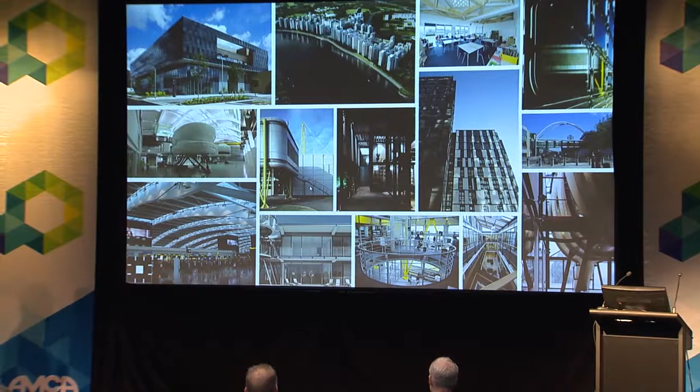So who are Bryden Wood? We started out 22 years ago as a firm of architects. So I'm technically an architect by training. It's increasingly hard to tell anymore. We always had a real interest in design for manufacture and assembly. So we were specifically set up to answer this sort of question.

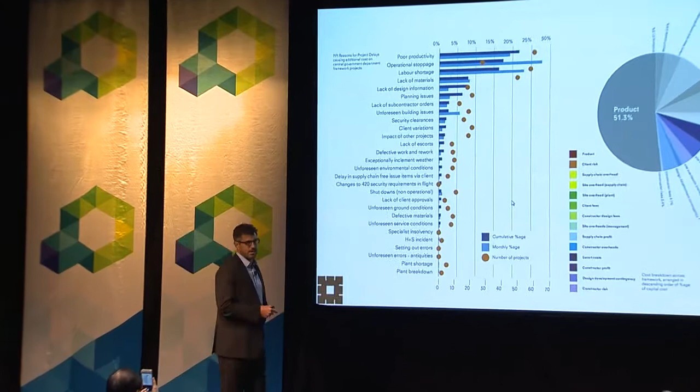So everyone's got their favourite statistics for why construction's so crap. You've seen the productivity one's been mentioned a couple of times over the last couple of days. You've seen the statistics for numbers of projects that go over budget, over time, et cetera. These are my favourite statistics. This is from a big trawl that one of the main government departments in the UK did on all of its projects over its framework, and it found that these are the big hitters in terms of projects overrunning in terms of cost and delays.

You can see the big problems are poor productivity, we've talked about, labour shortage, lack of materials, lack of information. So if you could get the right things to the right people at the right time with the right information, that's a significant chunk of the problem sorted. So come on, construction, we can do this.

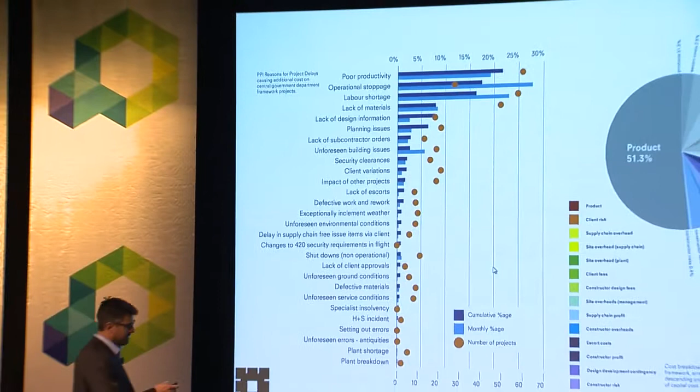This is another one. They looked at how much of every pound they spend ends up in residual asset value. I suspect this is not atypical for lots of clients. Only about 50% of the pound or dollar they spend on a project ends up in actual value. The rest of it disappears into all of these other things. So a sort of traditional value engineering exercise would be to squeeze the supply chain and try and eke out a few percent. Our thinking has always been, forget that one, that's a massive chunk to go after. If you could start driving down the percentage of non-value adding activity, that would be a huge step forward.

Those are those arranged in order. So product is 50%. Client risk is the next biggest one, which tells you something about the state of the industry. Then you get overhead on overhead on overhead, because you get the multiple tiers from main contracts all the way down.

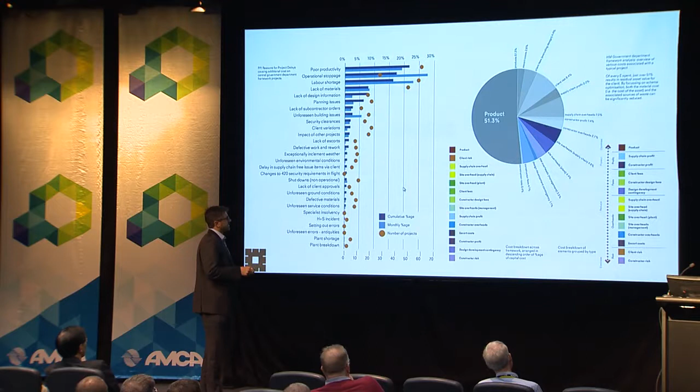We've been reorganising this and saying, right, we will absolutely optimise the product. So this is what manufacturing does really well. The car industry, aerospace for years have been shaving grams off components, taking out activities in the manufacturing space, just making incremental changes that make the product ever better. So we optimize that, we protect this.

As I say, clients very often try and squeeze a few percent out of the supply chain. If you do that, they will hate you, and they will get that money back because they will gouge your eyes out on every single change order. We've been saying to clients a much more sensible thing to do is protect people's profit, be very open book, make sure people get paid well for the work they do. That will enable the behaviours that then allow you to move things forward.

The next one down, we try and reduce fees. So for an architect telling you that we're trying to reduce design fees is a bit spooky. It's actually been a sort of recurring theme over the last couple of days around the use of tools for automation, spending more time on the really value-adding bits of the design, not on the churn of door schedules and pulling things out. So we're trying to actually overall reduce fees by learning on projects and doing things better each time. So ultimately it becomes quicker and easier to design buildings, and we'll show you what that looks like.

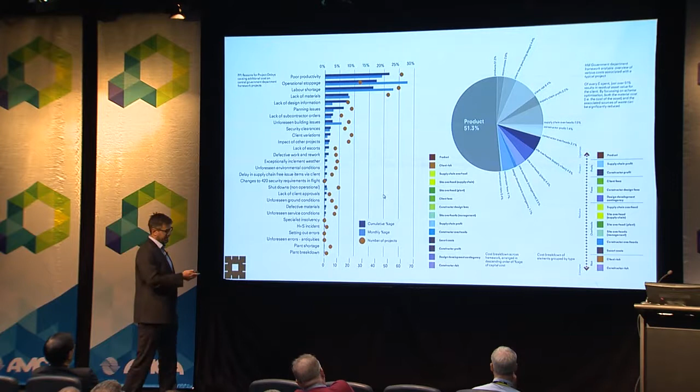So materials start to accumulate cost as they go through this process. Doug yesterday talked about if you had an absolute focus on speed of assembly, you would start to change the whole design process, you would start to do things very differently. Our equivalent is focusing on asset value, residual value, and saying the closer we can get to raw commodities, the closer we can get from literally raw material gets touched barely at all, and then it's a building, that will start to drive out huge chunks of this. It will start to get enormous value. It will start to change the way you design your buildings.

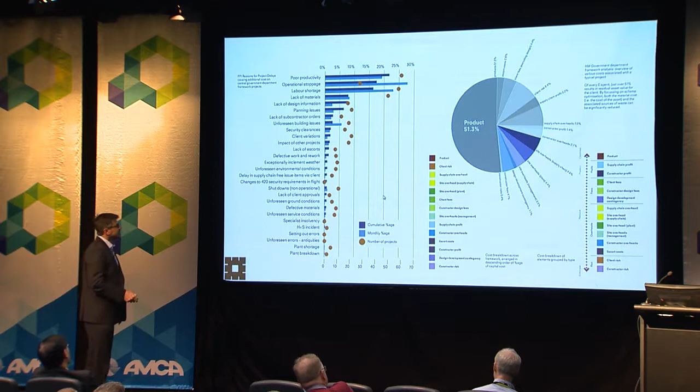And then the bottom one, we try as far as possible to eliminate this. So we do an awful lot of testing, prototyping of systems. Typically on our buildings, by the time we get to site, there is nothing left to learn. People are not there measuring, scratching their heads, wondering what to do. People are following a series of instructions and assembling assets, and we'll show you what that looks like.

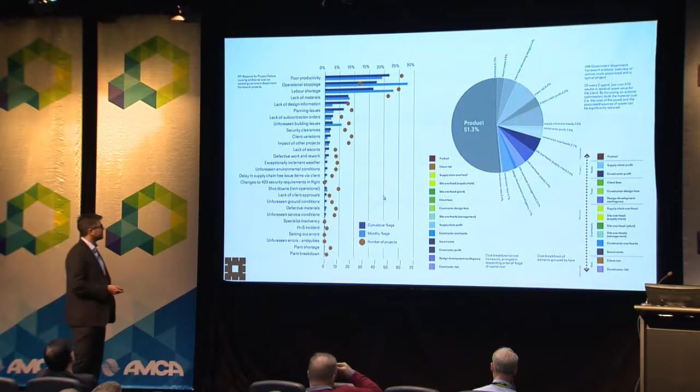So again, for a team of architects, some of the biggest gains we're making at the moment are in infrastructure. So we're coming into water, rail, roads. The fact that we're architects, people assume you can't possibly know anything about roads and rail, which is actually a good thing because we don't come with 30 years of doing the wrong thing. We come in with a very refreshed attitude saying, why do you always do that? What's the principle? We get very quickly back to first principles.

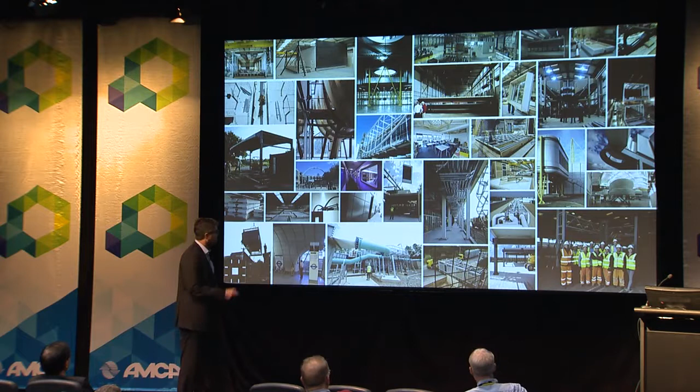The other thing on that to notice, that was our factory. So for about 8, 10 years, we had our own factory, which sort of came about because we got really annoyed with the industry not keeping up with us. So we started out as architects in 1995. By shortly after 2000, we got our own mechanical, electrical, structural engineers, because we had to have all the disciplines to do the things we wanted to do. We then started prototyping, those are the 2 Simons, prototyping some of the systems that we wanted to do, because again, we got annoyed of designing things that the industry said, you can't build a building like that.

And eventually we got our own factory because we just had to completely own the process. We don't have the factory anymore because we'd sort of proved the point. We didn't need to manufacture things as much, and we now have a series of facilities that we use on and off to prototype systems.

So we're much more likely now to develop a system, prototype it, test it, learn everything there is about it, and then we go out to the market and say, right, I'm not asking you to design anything, I'm asking you to do this activity 10,000 times absolutely perfectly, and it's a very, very different way of procuring.

We would typically back ourselves now to take 30, 40, 50% out of cost and program for almost any project. These are some of the big modular things. That's that data center stuff at the airport again. You can look at those later.

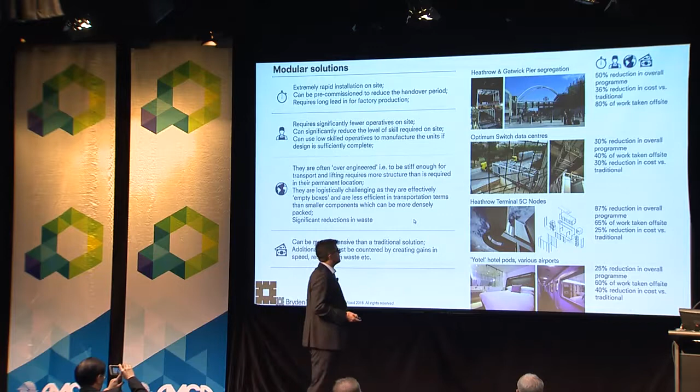We've almost always worked in a very 3D environment. So the reason I got involved in the BIM task group when Mark Bew and the team started setting things up, we were one of the very, very few people that had actually been doing this for a long time. So we had an awful lot of expertise around using not only software authoring systems, but also data visualization platforms.

We use a thing called Lanner Witness, which is software typically used in manufacturing to model manufacturing processes. So we don't just have the design authoring software. We bring a whole load of different skill sets to bear.

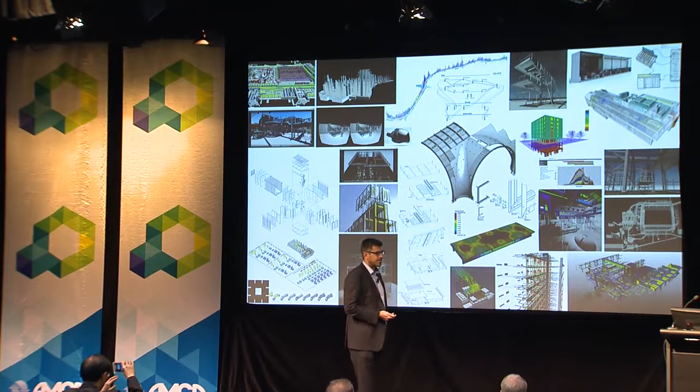One of the biggest growing teams we have at the moment is mathematicians, financial analysts. We've got some chemists. We've got a geophysicist. So some of the people we're employing now are just not at all construction people. They are just bright people who can work very complex problems. So we do increasingly very front-end data analytics, data modeling now.

If you look on the website, these are the capabilities we talk about. So we've still got the traditional design disciplines. DFMA sits fairly centrally. Systemization is like the big brother of DFMA. So if you want a one-off project, you want some DFMA. If you want to build Crossrail or a series of hospitals or the big justice estate, you need systems.

So we do an awful lot of work in this space now, generating mass customizable, flexible components so we can generate very site-specific, very individual buildings, but using components that are almost completely standardized. So just as every person is completely different on the outside, at DNA level, we're incredibly similar. Process facility is some of the complex pharma things we'll talk about.

Design for asset optimization is a thing where increasingly now, and this has been talked about over the last couple of days, we get called in by clients or contractors to fix designs that are non-constructible. So very often, clients get a design in, it's just too expensive. We get called in to re-coordinate it, rework it, turn it into a DFMA type thing. So I'll show you what that looks like for Crossrail.

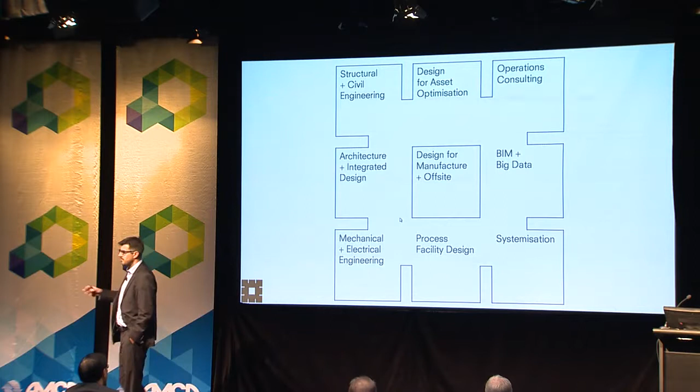And ops consulting, we got to a point probably 2008, 2009, where we were saying to clients, look, we know that if you want a building, we'll nail that. It'll be quick, it'll be cheap, it'll be very high quality, it'll be manufactured. We could still do a fantastic job of building completely the wrong thing because you as a client don't know what you want. So we found lots of clients effectively write the brief by building the building and then knocking things about through the construction process and then making lots of changes and then ultimately getting a building going, yeah, now I can tell you what I want.

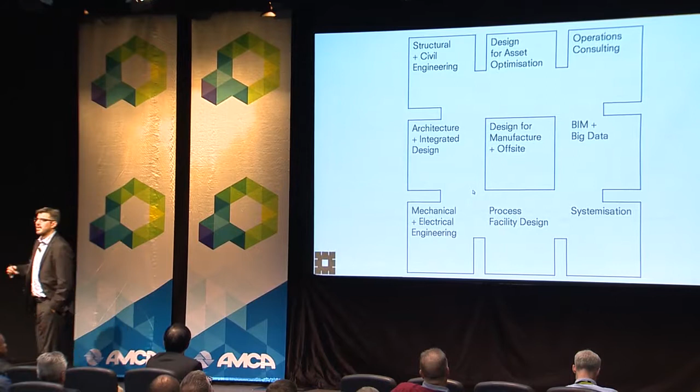It's not quite this. So we started moving earlier and earlier in the process to say, actually, don't tell us what the brief is. Tell us what the problem statement is, and we'll help write the brief. We'll develop the brief. Then we can design a building that won't keep changing through the design process. Then we can start to componentize it.

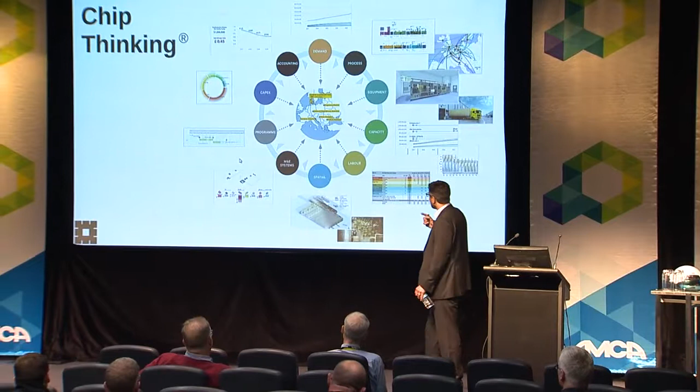So we ended up with a methodology we call chip thinking. We found with particularly complex client organizations, so GlaxoSmithKline, healthcare people, they have a whole load of different stakeholders. They all look at the business through a really specific little lens. So they're sort of subject matter experts on one tiny bit of the problem. They very often don't talk to each other. They very often don't know the others exist.

So we started breaking buildings or processes down into sort of value-adding or transformational activities. We then started finding out what every single person in the business knew about that particular aspect. And the idea was like chips on a motherboard, that you could aggregate loads of information or insight around a particular thing. You could plug a load of them together and then you could see what happened and you could see how buildings started to work.

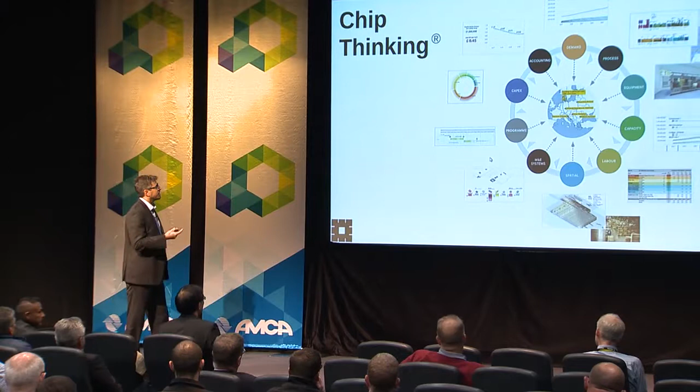So a healthcare example, at one level, we'll model every single nut, bolt, screw and piece of medical equipment in a theatre. At one of the chip levels, a theatre never exists on its own. It always has a clean core, an anaesthetic room, clean and dirty circulation, some plant that comes with it, a digital hub. So that's a sort of cluster of things that always happen together. So you can start to break buildings down into clusters of activities like that, start to learn how they work, and then start to put them together and test a bunch of hopefully very visual kind of data outputs.

So these are all the sectors we work in. I'm not going to talk about all of these. I'm going to explain the pharma stuff because it's a fairly quick way of showing sort of end-to-end the sorts of things we do. I'm going to talk about rail and highways just because they're some of the more sort of digital to physical linked things we're doing at the moment.

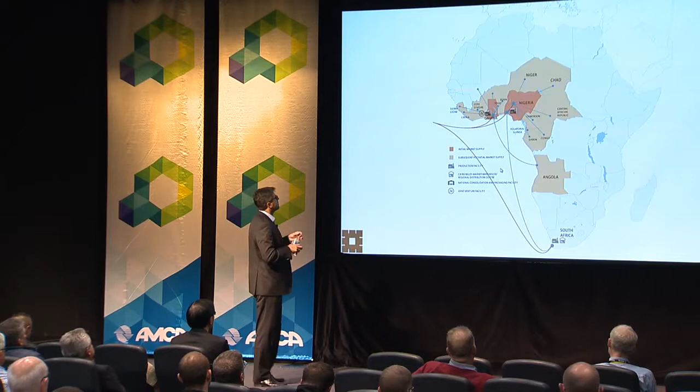So this is a good example of a problem statement that clients come to us with. GlaxoSmithKline have an initiative to get to 80% of the African population by 2020. So that was the question. They came to us and said, Africa, what do we do?

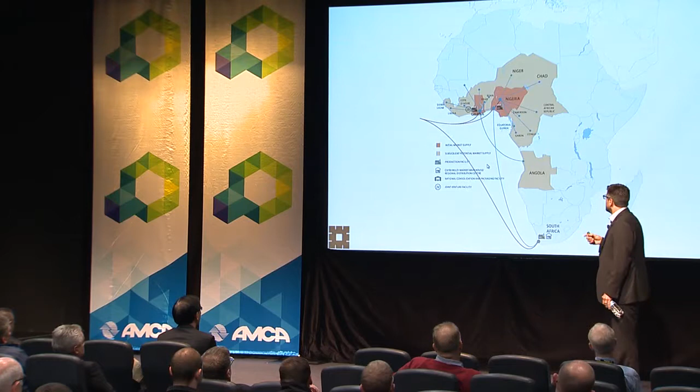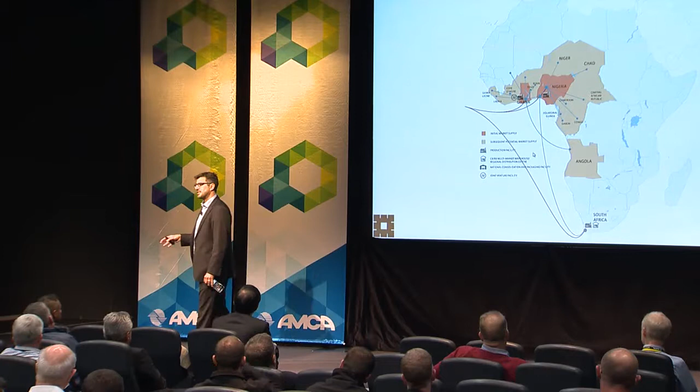We've now got to a point in our office where we've got an entire floor of the office that we literally give to clients. So we give people free space in our office to come and work from the office. People were saying, why would you want the clients there always looking over your shoulder? We were saying, I guarantee you the gains we'll get in terms of productivity and our speed of iteration by having the client there will more than pay for the space. We don't mind clients seeing what we're up to. We'd rather be very transparent about it.

And we found now that we have a completely permanent presence of GlaxoSmithKline people in our office. Adam heads up our Singapore office, which was largely set up to work with the Asia Pacific GlaxoSmithKline people. So we have this sort of nice relationship now where it's impossible to tell who's one of our people, who's a Glaxo person, who's a chemist, who's a specialist in a particular piece of production, who's a logistics person. And the speed with which we work these problems is now absolutely lightning fast.

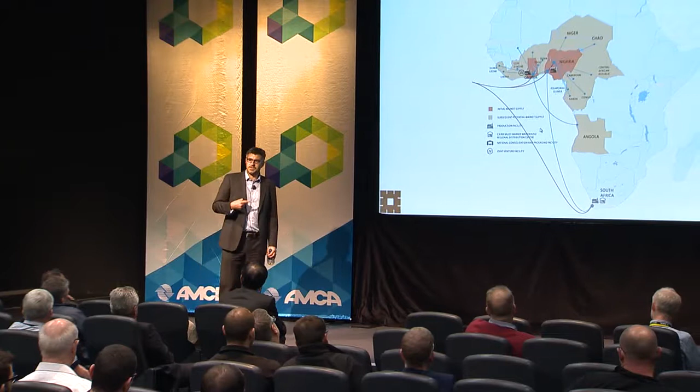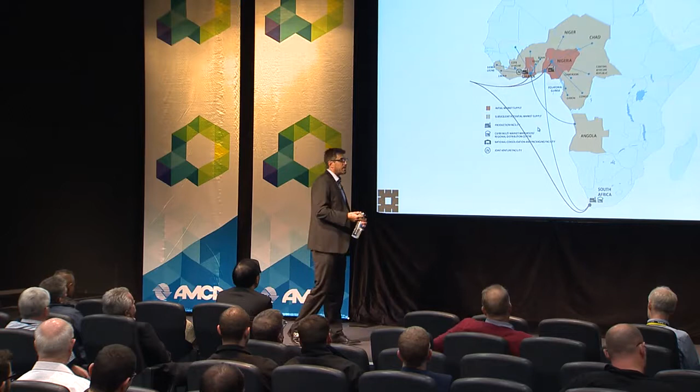So for this exercise, we did effectively mathematical models describing population centres, infrastructure, geopolitical stability, transportation, logistics. We started churning lots of options around, do you bring in finished product and distribute it? Do you bring in raw materials and make it? Do you bring in finished things, package them? What do you do with Africa? What's the mix of products? Where do you make them? How do you build them? Which has been enormously successful.

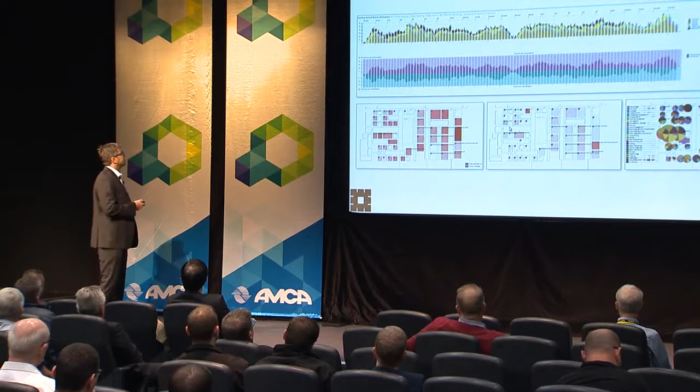At the next level down, Adam gave me a great example just now actually, one of the things we very often do is convince people not to build a building. So Frank mentioned this yesterday, the idea that the best building you'll build is the building that you don't build. So this was an example where the assumption was a whole new asset was needed.

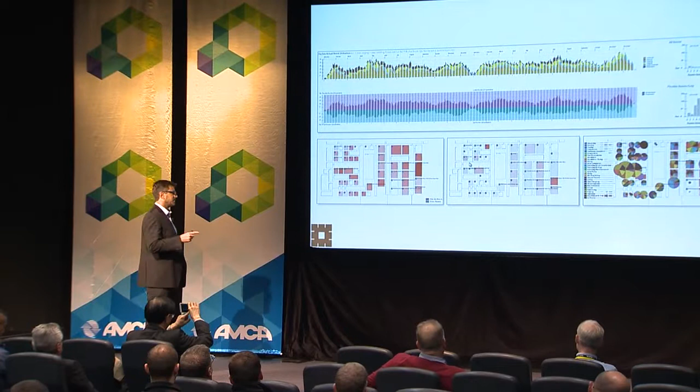We went in and we measured the intensity of the usage of all the different spaces, and then the types of capacity, types of capability, what they did in those spaces, and worked out that you could upgrade some of the MEP equipment, you could make some of the spaces a bit multifunctional, you could get a room booking system, and you could wring out quite a few, do you know the numbers?

Quite a few percentage of extra capacity from exactly the same equipment, exactly the same machines, people, all the rest of it, just by organising things differently. So we very often now get people, you get the project sponsors that got the £50 million check. It's the only time in their life they'll get to commission a building, and we're saying, I wouldn't do it, just wouldn't build it.

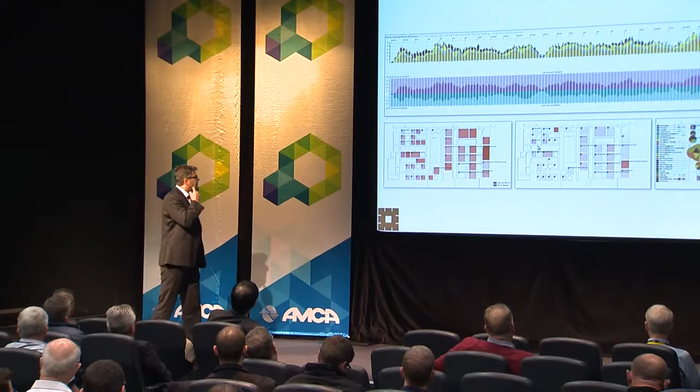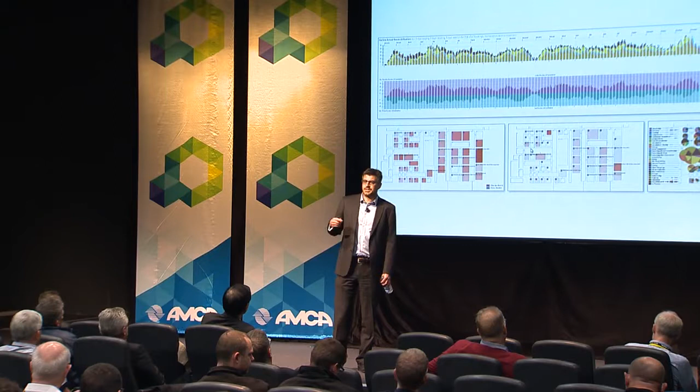We got audited by McKinsey a few years ago now to come and look at all the stuff, because Glaxo were making some really big decisions based on our say-so, based on some fairly young people doing some stuff on Excel. Actually, McKinsey audited us and said, they call it best-in-class consulting, and said the most valuable things we had done were things where we'd convinced them not to do a project, and then 6 months later, lo and behold, population growth wasn't working the way they expected to. The market was moving away, generics were coming in.

So we've got loads of case studies now. There's another one, I can't tell you the details of it, but you reckon you've saved 39 million quid this morning from convincing them not to build a new asset. So this is really powerful stuff now. What it does mean actually is that when there is a project, everyone sort of trusts us to do it because we've gone through all the iterations.

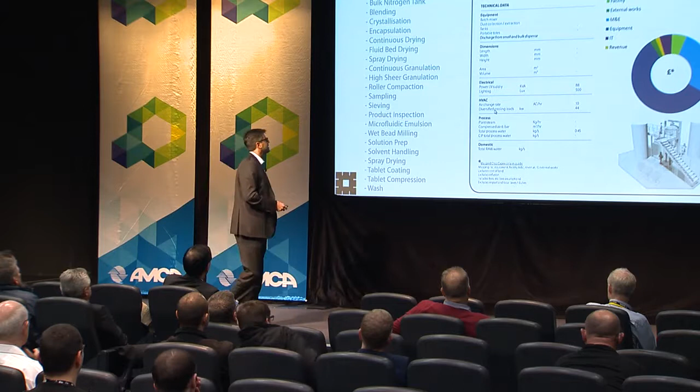So next level down is the individual chips for a piece of equipment. So we've got now certainly hundreds, probably thousands of these chips for probably every type of process that you need in the pharmaceutical space. We've got a library of chips for healthcare. We've actually got a chip library for justice now. We've got a sort of series of these chip libraries that we deploy. So typically we have a little model. More importantly, we have every bit of data, including things like the numbers of people, the types of people associated with that piece of equipment.

One of the big wins we had early on was we started attributing utilities to individual chips. So there was a particular site that Glaxo had where it used tons of water and electricity, and they kind of split the bill by 5 because there were 5 products. When we really started looking at all the processes, we worked out that one of the products was using most of the electricity and the water, and it wasn't nearly as profitable as anyone thought. And it transformed the product mix going into Africa. Obviously, they don't want to make a thing in Africa that needs loads of water and electricity.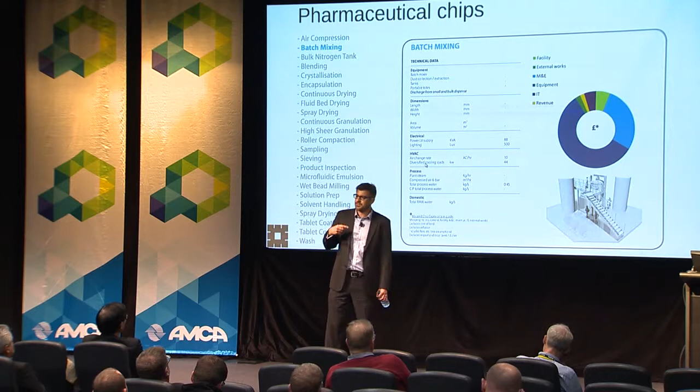So just the fact we started pulling these things apart, we'd said to Glaxo fairly brazenly back in the day, I mean, now I'd say we know lots about pharma. At the time, we didn't. But we had a guess that we would be able to explain to Glaxo more of their corporate knowledge about any topic than anyone in their business, which is a fairly bold thing to say. But because of this process of really collaborating, really dragging people's knowledge in, we're actually able to do that quite successfully. So that's a typical chip.

Sitting behind that is as much data as we can get our hands on. Some of it's guesswork, some of it's really well-structured, validated data. We'll take whatever we can get our hands on. So we get a real mix of things that are finger in the air estimates down to things which are measured on a day-to-day basis. But chips are a really nice sort of repository for anything we can get our hands on.

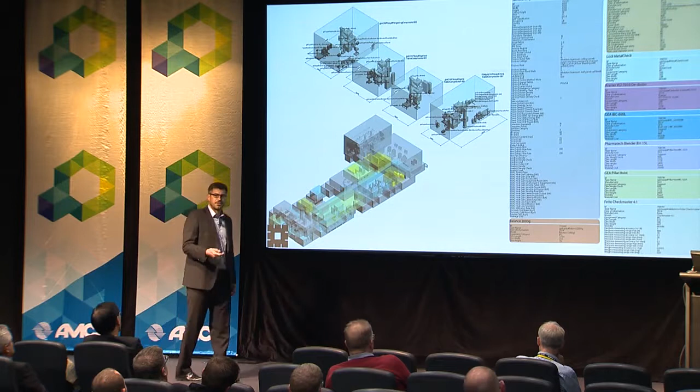And then we plug them together. You can test endless different scenarios. You can start to try out lots of different, we've talked about sort of machine learning, generative design. This is all the sort of stuff we do with chips now because they're a sort of useful data-rich repository. You've kind of seen some of this stuff earlier. I was going to talk about sort of process flow diagrams, which are captured in Excel.

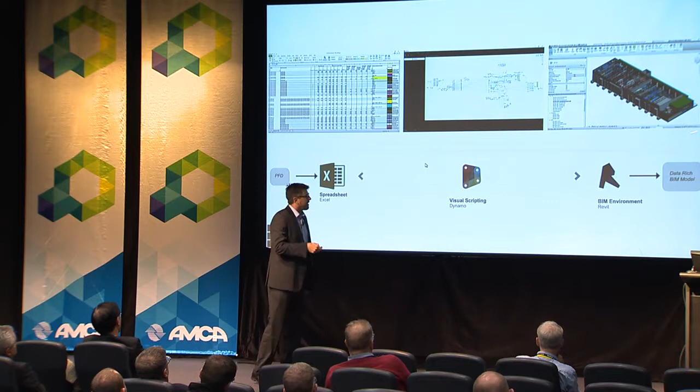Script it in Dynamo, and then we start to get generative models for complex processes. Some of the stuff we're doing now is in biopharm, so this is emerging technology. We're designing buildings for processes where no one knows what the process is. No one really understands the chemistry, and probably the kit hasn't been invented. So you've got to build a building for this sort of complete unknowable world.

So we just start generating these basic models. These have got loads of parameters, and every time you know a little bit more about the process or the equipment, the model updates itself around it. So we end up with these. This is actually a precious metals refinery project. These are various processes, and every time you learn a bit more about any of those things, the entire model flexes around it, and you get to the point where the process is done, and then you slap a building over it.

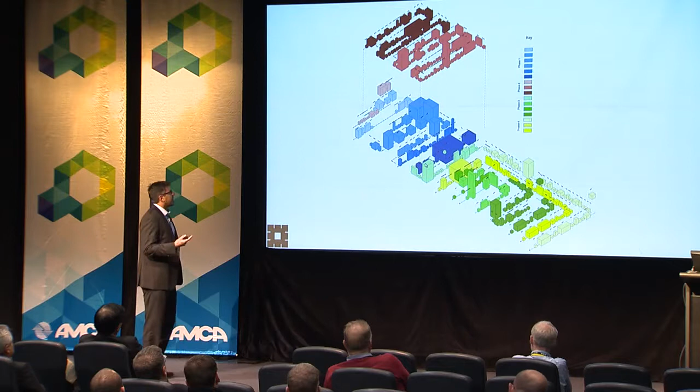So increasingly for our clients, it's been known for a long time: the construction cost is X. The FM cost is probably 4 times bigger over the life of the building. In healthcare terms, staff costs are then 3 times bigger, and then the business outcome is however much bigger, and then the societal outcome is enormous. So actually construction cost is a teeny tiny bit of the value chain if you look at what buildings are doing. GlaxoSmithKline happen to need buildings to put the processes in, but their business is healing the world, fixing the world. So I like the quote that Shane had on the screen earlier about the factory is the machine for making the machine or making the component.

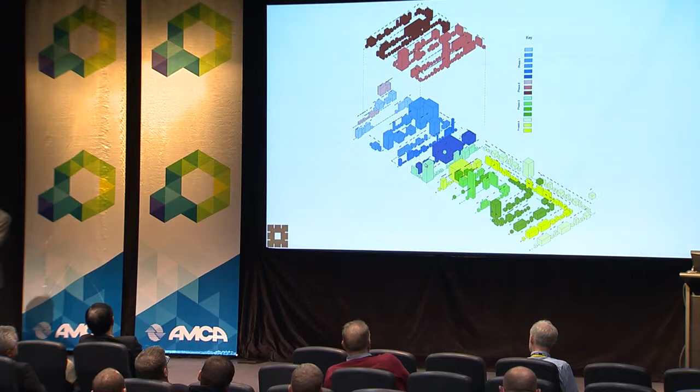We spend loads of time really understanding the process, optimizing the process, planning all the future flexibility, all the rest of it, and the building sort of reveals itself late on in the process because it's actually the last thing that you need to do. The more time you spend on the machine, obviously the better the outcome is. So that's a quick summary of chip thinking.

So we get data capture. Yesterday people were talking about LOD, LOI. So this would be LOI, I don't know, through the roof because it's got endless chunks of data, but it's completely geometry poor because we don't really care what the components look like. So this is a series of chips.

Things come in, they get stored, they get turned into products, they get stored, they go out the door. You can imagine at this level, we can run endless iterations around: do you have fewer vehicle movements, more storage? Do you have less storage, more vehicle movements? What happens if you add a line? What happens if you add a new process? So very often we don't try and design a solution. We design a search area of solutions, and then we gradually converge on the answer.

The other thing that's quite nice about these: some of these will be chips that have really well-known data measured from existing facilities. Some of these will be chips that don't exist. So you can drop into this a chip that doesn't exist and say, if you had a chip that did this, this would be the impact on your business. You need this chip. So let's trawl the market, we'll talk to Siemens, we'll talk to GE, we'll start to work out whether you can get a chip that does this.

So in our library, we've got some chips that are real chips, some chips that we kind of made up, chips in different stages of development, but you can drag them all in, and the ability to work with the real and the unreal at early stage is quite powerful. And then we generate, hopefully, very visual outputs. This is looking at staffing costs, this is predicted. So bear in mind, we're nowhere near designing a building yet. We can tell you how much it'll cost to run the facility when we have designed it. So the ability to future investigate utilities costs and things is incredibly powerful.

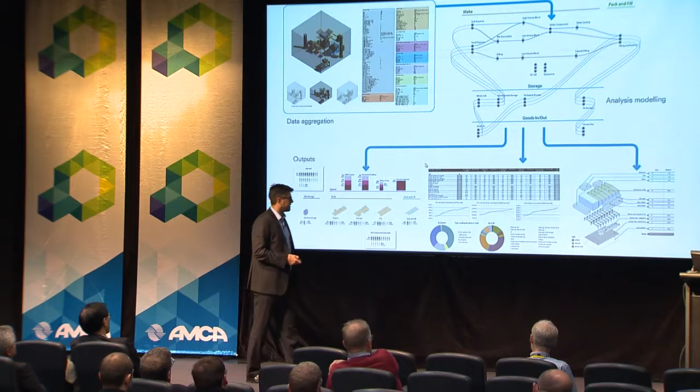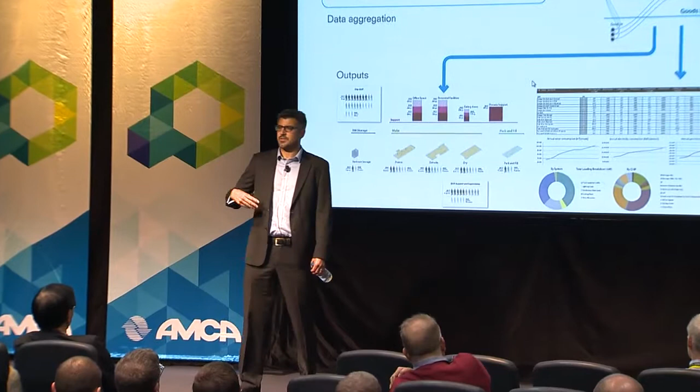The other thing we very often do, you can't read that, but these are faded out because this is the staffing costs we think you need today, and then this is our guess at what the staffing costs look like in 5-10 years. So very often now we're not designing a building, we're designing several phases of a development. There's the building that you can afford now, and then there's the building that we think the business needs probably in the future.

So these are the sorts of things we get out of it. Faster option appraisal, because we have the client on side. You don't ping them an email and wait a couple of days and then they come back and then we have a chat about it. You literally drag them and go, we're about to change something, come and tell me the answer to this.

Joint decision making, because everyone can see how the thing that they've contributed was embedded in the chip. They can start to understand exactly how their bit of the puzzle relates to everyone else's. We started doing a thing which was really powerful actually, where we started naming individuals who had told us anything and then color coding the quality of the information.

Because what we found is you go and talk to a subject matter expert, you'd ask them a bunch of questions. Some of the answers they would give you would be things they absolutely know because they've done it for 30 years and that's their bread and butter. Some of the answers would be complete guesses because no one's ever asked them the question before. What we found when we started running the chip models is you get some really bizarre outcomes.

So we said to GSK, it's fine to guess as long as we know you're guessing, and we'll tell you whether it is important or not. So when we twist all the dials, with certain things you can do that and nothing happens, you go, right, you can be out by a factor of 50, doesn't make any difference. There'll be other bits that are incredibly sensitive.

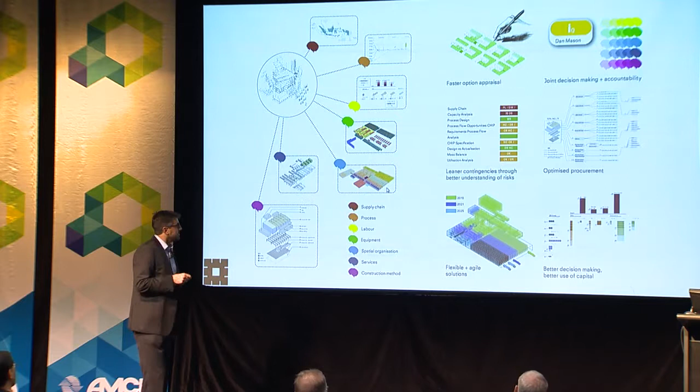So we start saying, right, let's do more investigation on this topic, let's find out more about a particular thing because it's actually really critical, which means that we don't have to have a sort of blanket 10, 20% contingency. We have very, very specific things that we know are known risks, and we can work through those. We get better procurement, and I'm going to talk about that in a little bit.

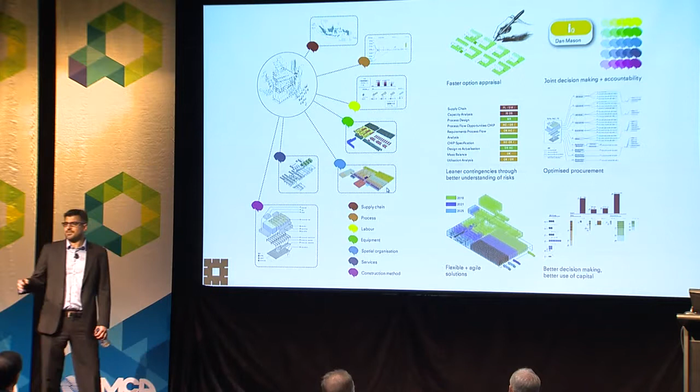As I say, we very often now design multiple phases of buildings and help clients make better informed decisions. So we very often say, look, we think you'll need tons of power and water in 5 years. You can either invest now and over-specify resilience for power and utilities, or you can leave it and know that in 5 years you've probably got a problem coming, but at least you know you've got a problem coming and we can work through it. So it makes clients much better informed and therefore spend the money more wisely.

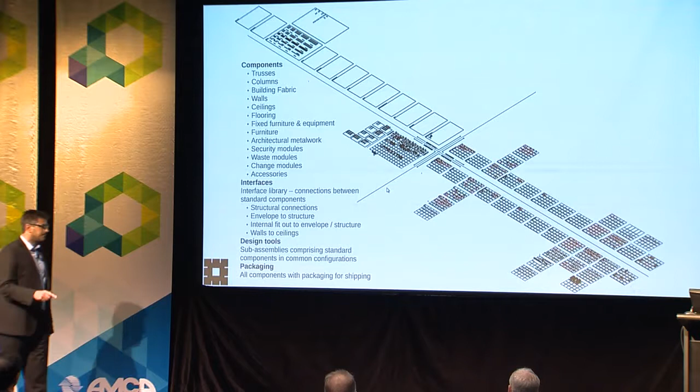So the outcome of all that, because you're here to hear about making things. So in the African context, having done all of that, we kind of knew what types of projects would be coming up, where they were going to be built, what they were going to be making. So we could then spend a load of time developing. This is a digital library of very parametric physical components for building all these buildings.

So again, that's the list of components you need to make endless different facilities all over the world, but you only need those components, and you can spend a lot of time optimizing those and making sure they do all the things you need. That is the packaged version of each of these. So all of these are designed to fit an ISO shipping container.

So if you can make the thing in country, you send the files out, they make the bits, and off you go. If you can't, you can make it in the next nearest region where they can make the bits, put it in a shipping container, it becomes a logistics problem, things come out of a box and they just get bolted together. It's called factory in a box.

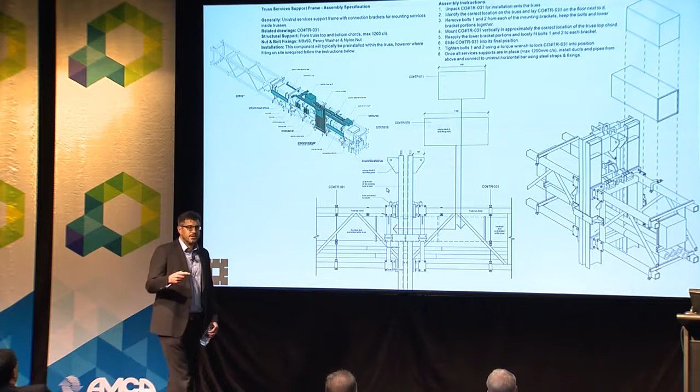Each of those bits comes with its own assembly instructions, and each of those bits knows, for instance, it needs an M8, it needs a penny washer, Nyloc nut. So you can model a building and print out an instructions list, and you'll get like 1 million instructions, but you will build yourself an antibiotics factory or whatever it is. It will literally take you through step by step how to manufacture the building.

This is antibiotics in Nigeria. So this is the initial phase, that's where we think they'll end up. All of these components know when they've been moved around, so you can do all the sequencing and all the planning for the buildings. This is literally fabrication quality modelling. You would build the building directly off this.

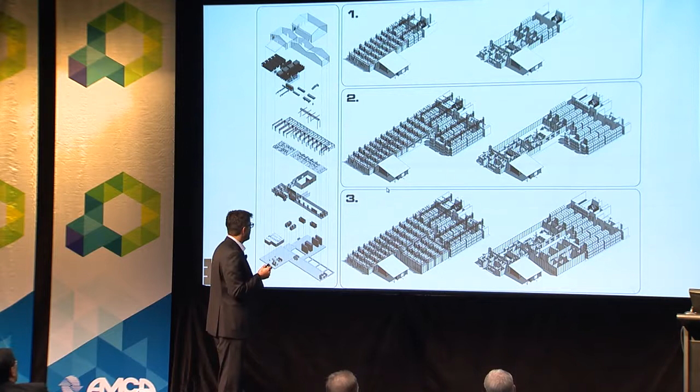Jim, when he first modelled this, zoomed in and was saying we can't get that bracket less than £3. It's quite a nice bracket, but it's costing us £3. But that's the sort of conversation we're having in the office now.

We are talking about component level design, component level manufacture. This, when you've modelled it, it knows how long it takes to build, it knows the cost, it knows the supply chain, it knows the logistics planning. We deconstruct these virtually and put the models into virtual shipping containers, which gives you a packing list of the actual things you need and the sequence in which you need them.

So this now becomes a logistics problem that components turn up, they come out of the box, it's exactly the one they needed, they bolt it to the building. So some of these sites in Africa, you can imagine security is a problem. Things get nicked all the time. So the idea that things literally turn up just in time, get bolted onto the building, no one can nick it, that's really powerful. And again, it just becomes this assembly thing.

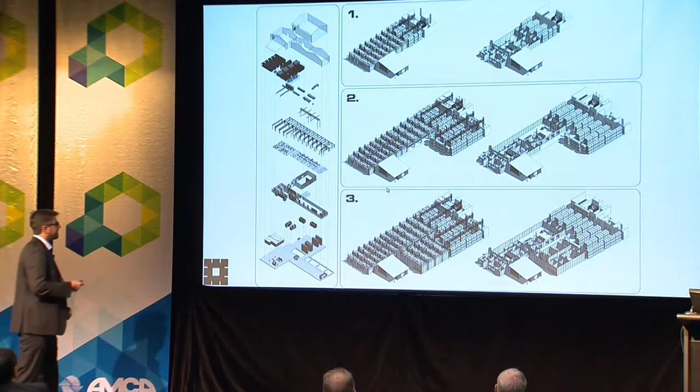To model this took 2 people 2 days now. So the speed with which we're churning these things out, because they literally get the brief, they go into that digital warehouse, they get the bits they need, they bolt them all together in the model, we're done, that's it. You can go and build that 2 days later. So that, again, that sort of speed of iteration is groovy.

So out of that, because we're now talking about components, we're optimizing the components, we can start to really understand the supply chains. We are starting to go way below kind of tier 1, tier 2. We're now talking more directly to manufacturers. So all that overhead and profit, we're scrapping that because we're now designing individual components and going out to the best place in the world to make those components. So we can get incredibly good prices.

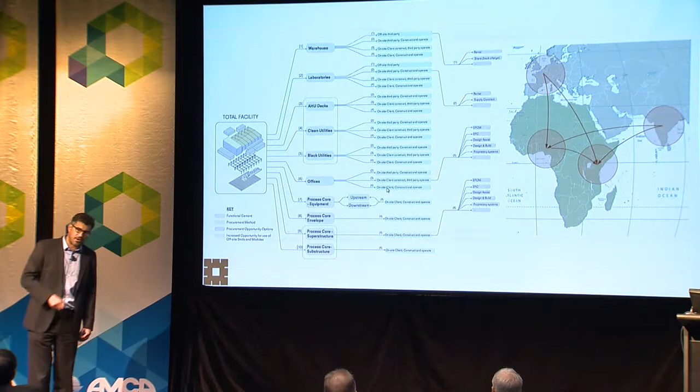We don't have to go to specialists now because the components are actually getting relatively simple. So our supply chain is massive because we don't need to talk to a proper steel fabricator. We can talk to the steel manufacturer and we do the least amount of post-processing on the steel. So again, this is driving that residual asset value right down. We do an awful lot of this sort of stuff. You've seen all sorts of examples.

We do a lot of VR, firstly for the people that will build the building. So by the time they go on site, they've done all this before. They've kind of rehearsed it.

Just looking at time. Yeah, it's all right.

The other thing we do is we use this to induct people who will work in the building. So it's like the world's crappiest computer game that you come into the office, put the goggles on, you come in, you have to gown up and scrub up in the right sequence before you can go to the next stage, do the next thing before you go to your work face. So what it means is we get fantastic feedback. So people will work in the building for a shift and say, right, I could do with a vision panel over there. I need to move that. So we start to get really rich feedback.

From Glaxo's point of view, it means that when these buildings go live, like day one, they are fully operational. There's no learning curve because everyone's done it way before they got in the building. So we're training people up, maybe 18 months, a year before the building's actually complete. But as soon as they go into the building, they go, oh yeah, that's where I always go to work and that's where I always do my stuff.

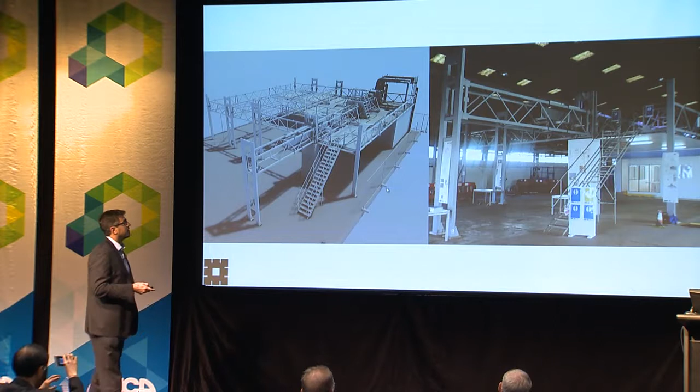So we love a bit of prototyping. This was obviously the model. This is the sort of thing we do in the factory now. This is a working GMP clean space, but it was built in our factory. This was then dismantled, reconfigured, and reused on a live project in the middle of one of Glaxo's sites. I've got some photos of that.

This is, you've seen this kind of stuff. We use Enscape, but that's just what the model looks like. So when you've got your VR goggles and you're walking around, that's the kind of quality of the imagery. There's no post-processing on that. Notice coloured components and brackets all over it.

This is who built that. These guys are Gurkhas, so they're ex-British servicemen and women. They're not construction people. They've got no construction training. They've never built anything before. They can kill people, which is useful if it kicks off on site. But we took these guys, we trained them up in the model.

They built a GMP working space. They build complex pharmaceutical facilities. So we've got in the UK this skills apocalypse coming because, as mentioned in the last session, we actually haven't got enough people. We've got an ageing population. We're about to lose a bunch of people.

UK government has recognised that this is a massive problem, that we've got fewer and fewer skilled people. We've got an industry that's a bit crap, and then we've decided to build HS2 and HS3 and Crossrail 2 and Thames Tideway and Heathrow expansion, Hinkley Point, and 1 million homes. So we've got this massive problem.

Government is taking this really seriously now, the idea of low-skilled people that we upskill and train how to build these buildings. Because we can do it, we're actually getting the MOJ, the Ministry of Justice, to build some bits of their own building to prove to them how straightforward construction or assembly can be. These are some of the tricks we use.

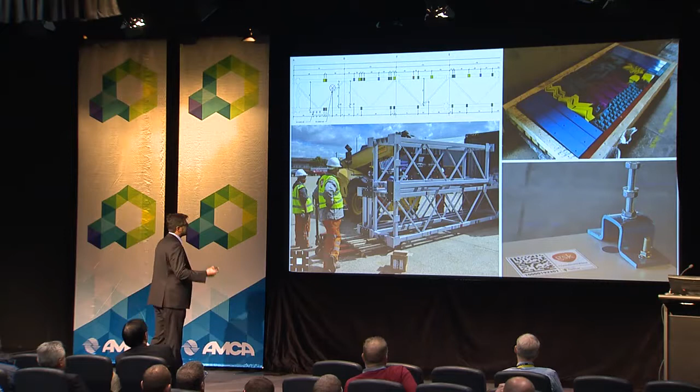So they just literally line up the colours, bolt the bits together. They don't stop to think, they don't stop to talk, they don't stop to measure anything. So all that thing I said about getting the right materials, the right things to the right people in the right sequence, that's what this looks like.

We put data matrices on all the components. So we track every stage of the manufacture; packing, unpacking, location on site gets attached to that QR code, so we can track the entire quality assurance record for every component. The other thing we do is we attach standard operating procedures, again, like manufacturing, to those QR codes.

So you heard earlier about Africa, and everything's on mobile, they've gone straight to mobile. So we get these sites where people can't read, but they've got a smartphone. So all they need to do is ping that QR code and it will say, right, next, get a friend, get a spanner, you're going to bolt the ceiling things together, and off you go.

And then we collect that data because we can see how quickly they're pinging the QR code, which means we can then start to post-process that and say, right, what are the steps that are taking too long? Can we take out an activity? Can we coordinate things better? This is proper continual improvement.

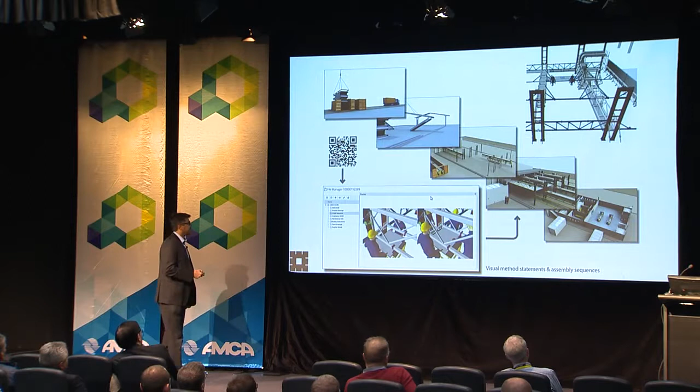So again, manufacturing's been doing standard operating procedures and constantly updating and refining those as it goes. That's what this looks like in a construction context. I won't talk about that because we'll run out of time.

And then you can see QR codes on the components, the colour brackets. This is the walk-on clean space ceiling. These are all made at tabletop height. And then we literally lift the whole thing up and it locks off, you put the ceiling things in, then you lift it up again. So no one works at height, no one goes on top of these things. Everything is done completely safely.

When we did the prototype, we tested it with hydraulic jacks and then block and tackle, because in these African sites, they've all got block and tackle. It takes ages on the block and tackle, but they like it because they can control it nicely. And yeah, it works like a flipping charm.

That's a snapshot of the database. So this is one of those QR codes. This is all the things that are attached to that particular element. So you can imagine all that data then goes back into the model for the next facility.

So I showed you that 4D model that Jim and Jacob did of one of the facilities. The outputs say how long it'll take to build it, to put it together and all the rest of it, and we know that's what it takes because it's all based on the stuff we've done previously. So these are some of the stats.

So yeah, it's quick, it's very quick. This, I think, is the killer. So 75% fewer people. They are then incredibly cheap people because they're not skilled craftsmen, they're not artisans, they are literally people we've trained up to do the thing, and then they are incredibly productive. So construction sites are normally 50, 60, if you're lucky, % productive. These guys are in the sort of high 80s, low 90s productivity.

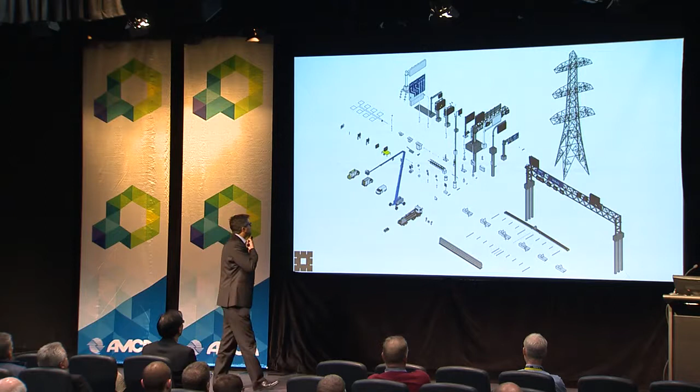Highways. So we were brought in by Highways England a couple of years ago now to develop their BIM library, which is a reasonably standard sort of starting point for some of this work. So they said, look, can you make us a BIM library? We said, yeah, it's fine, but won't be exciting. We modelled critically all of the operational and maintenance type phase, because people don't typically do that. So all of these library objects have every aspect of their maintenance, and we've got the people, so we build in all the clearance zones around them. We made them super parametric.

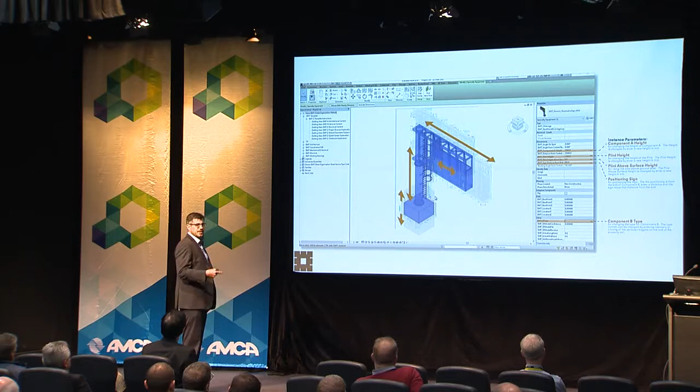So there's a whole team of people whose job it is to basically engineer every single one of these from scratch. So when we talk about reducing design fees, we think that's a big problem in the industry, that there's lots of people whose job it is to just keep churning the same problem, the bums on seats mentality. So we've said, look, not being funny, but why don't you just model it once, make it incredibly parametric, and then no one ever needs to do that again, which is making us unpopular with some of the other consultants. But obviously Highways love it because they've now got a very intelligent set of objects.

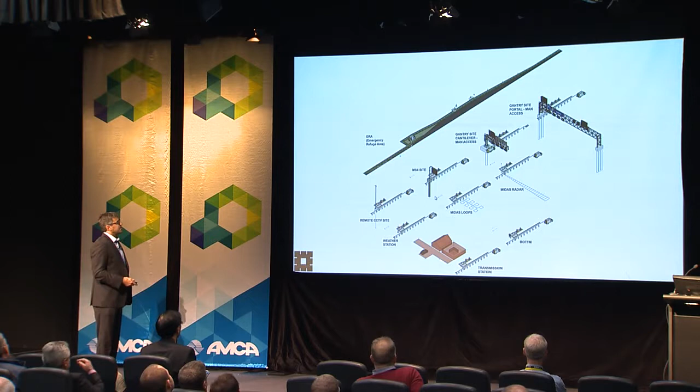We then put a load of those together as assemblies. So these are also super parametric. So when you drop in an ERA, it takes up the curvature of the road, it takes up the topography, it places all the signs that you need ahead of it, the right distance up the road, it checks the visibility splays and things. So again, this is the automated design thing, the speed with which we drop these components, and it now is lightning fast. And then you can imagine, once you've got them, you can optimize them, you can turn them into a super DFMA, design for manufacture space.

We developed a workflow. We found we couldn't get models of bits of the network quickly enough. So this is a workflow we developed. This model is made up of open source street mapping, Google Maps, some NASA geological satellite topography, British Geological Survey. So this is literally put together by a little routine that goes onto the net, grabs a load of open source free data, bangs the components in, and then it's in InfraWorks. So it's not perfect, but as a kind of 5-minute exercise, it's a pretty good starting point to then start layering in all the other information.

So again, the speed with which we get from nothing to a pretty good functional model of the network is getting there. Then all of those components have been taught how they relate to each other. So a gantry knows that it needs a certain amount of visibility before you reach it. It knows how close it needs to be to the next gantry. So all of these components are now nicely linked, so you can run an automated thing that just populates that model. So this is an exercise that would previously have taken a big team of people months to kind of potter along, dropping components and things. We'll now churn it in hours because all the components know how they're linked.

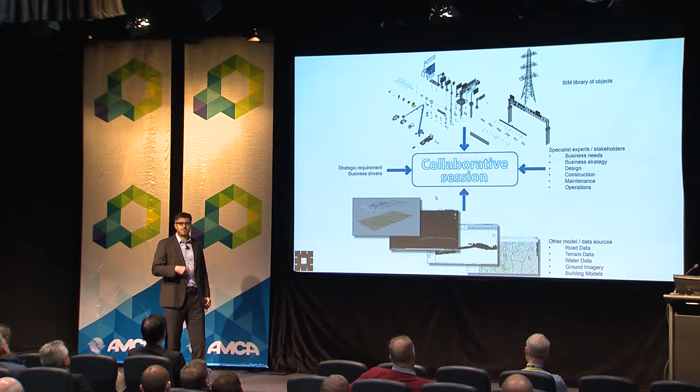We then have live modeling sessions. So before the session, we generate our base model, we put all our components in, and we then sit with people from every bit of the business. So rather than have the sort of, designer does some design, gives it to the contractor who says, I wouldn't have designed that, reworks it, builds it and hands it over, and the operational people go, I wouldn't have built that, and then they start tweaking it. We get people who represent every bit of the life cycle in the room at the same time. We model it live in front of them, we shift the components around, we get to the end of it and go, right, so everyone's happy? Right, go and turn it into a much more sophisticated model, but that then becomes a fantastic brief for the next stage.

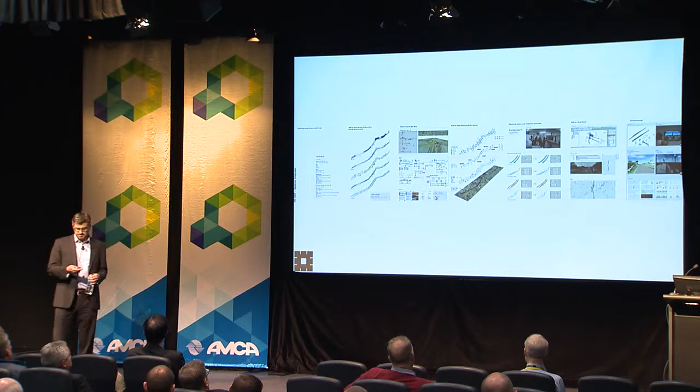So this is a poster that explains a rapid engineering workflow, that does some early stage analysis, populates the components, does some outputs. We then have a collaborative modeling session, tweak it, and at the end of that work, you get a fly-through, you get a model you can work with, we do some VR stuff, you get complete stakeholder buy-in, and it takes hours now rather than months. These, I think, are just beautiful.

This is some of the analysis that the computer does, where it's looking at the side grading, so it knows it doesn't want to place a gantry where there's a cliff face off the side of the road. It knows you don't want to be doing loads of cut and fill. So it will be looking for places where you've got the right sort of curvature, the road's flat enough, the gradient's okay, you've got good visibility, and this is some of the outputs from its kind of self-population activity, which is quite nice.

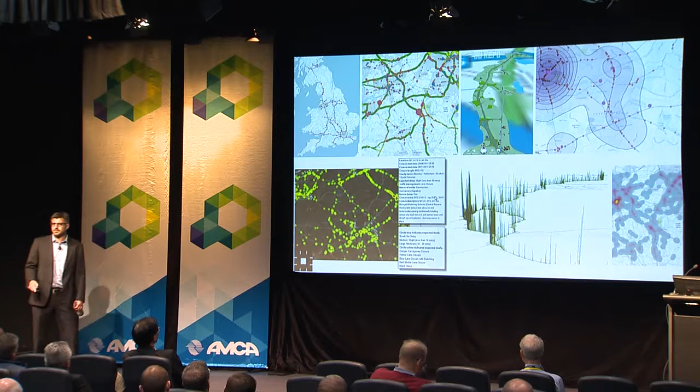We then, because it's the sort of thing we do, said, yeah, that's interesting, but how do you know, Highways, where to tackle on the network? Because we found out the contractors were saying that if they've got a choice between working on a big, long, straight bit of road or the nightmare junction, they'll do the big, long, straight bit every time. We're saying that's probably not where the problem was. So these are various outputs where we started bringing together loads of different Highways data, aggregating it, visualizing it, mapping it, and helping them to make better informed decisions. So we set ourselves a challenge of 3 clicks from network scale data down to individual components. So again, the problem statement started to say, well, how do you tackle the highways network and how do you get into that problem?

We then set up, this is for a live job on the M1, what we call a production control room. So we now bring all this stuff together. So we've got a wall that has all the mapping data, all the mapping information, a whole load of data, and then the models are brought together. So when you go into the rooms, we've now got this complete interaction between working at kind of the GIS mapping scale, going and seeing what's happening in the data space. So we track everything that happens, all the activities, all of the orders.

What we found, again, I think someone mentioned this yesterday, it started to completely change people's behaviors. So when we started doing this, contractors were going, like hell, I'm going to give you my information. Because part of their business model is to hold on to the stuff they've generated, ostensibly for the client. Once we started doing it, it started becoming really transparent who was providing data. There was almost sort of peer pressure forced on the people to then start to contribute their data.

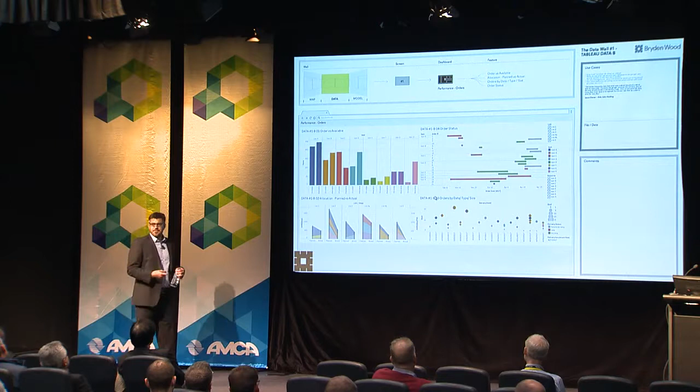Then Tyler had that graph yesterday that showed the sort of improvement as people started to collaborate. Then people started to realize that actually the more data they contributed and everyone else contributed, the more benefit everyone got. So then people started slinging data at us. And then you start to get in a very, very different space where people are really interacting with it and then working through the models at the same time.

So this is what it looks like in operation. So this is when we first set it up. This is one of these collaborative sessions. So again, it's about the culture much more than it's about the technology, but the fact that people are interacting live with the data and the model, making better decisions, the speed of iterations rocketing. I'm going to speed up a bit.

Right, Crossrail, I'll do this quickly. This is asset optimization. This is, I think, a really nice piece of asset optimization. So this is the Crossrail. It's the big east-west thing that goes under London. This is the architectural cladding, so what you see as a passenger. So this is a platform, say, and this is where the sail escalator comes down. We were brought in by Laing O'Rourke because they had to do a number of stations and they just didn't know how to build this. This is a classic non-constructible bit of kit.

So this was the original design. We said actually the design intent is that face. Everything behind that we can chuck away because it doesn't make any difference to the design. All of these are GFRC panels, so all of these were mechanical lift, which is a flipping nightmare. It needed endless fixings because it was so heavy, so that's a health and safety apocalypse waiting to happen and a tolerance issue and all the rest of it.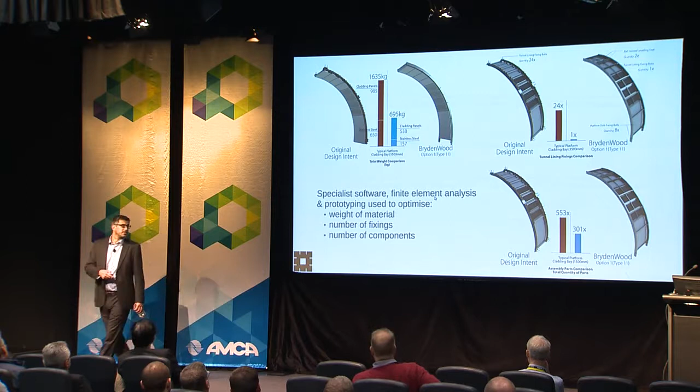So we did a whole load of very, very detailed modelling. Bomb blast testing, if you ever get the chance to blow shit up, do it because it's dead interesting. To work out what was the thinnest thing. This is the optimization bit that I talked about earlier. So we got the weight of these down by 2/3, that's massive. These are all now a manually handleable bit of kit, which is nice. Number of fixings down by a factor of 24. So imagine all of the tolerance things and health and safety things and all the problems you're about to have. And then way fewer components, which is nice.

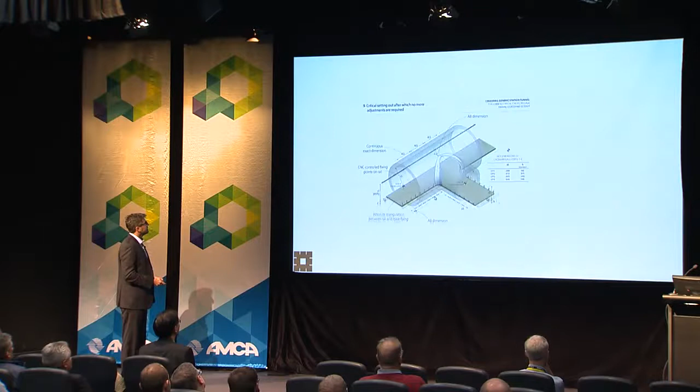This is how we did it. So the tunnel, it's not like the one you saw earlier. It's sprayed concrete, so it's all over the place. And obviously they've woven this thing under London, so it's had loads of constraints around it. So we said, look, what you don't want to really do is touch the tunnel. So we'll put in this rail, and we'll get that absolutely perfectly aligned in space. We'll do the same thing on these bits at the bottom.

And then we don't ever touch the tunnel again, because now I've got rid of all my tolerance problems, because I've now got absolutely fixed points in space that I can fix the panels to. In the smaller tunnels, we don't even touch the tunnel. It just sits on the platform. We've then got a model. We literally model every single nut, bolt, screw, washer, like everything that happens is in the model.

We make these ladder frames, because that's a fixed point and that's a fixed point. You make this ladder frame and it wobbles about a bit. So we rejig all of these points, put these little pegs in, and then they're sort of mass customized for that specific instance. But what it means is all of these are now perfectly aligned in space, so we don't need any adjustment on these. So on the original design, I've got a wardrobe at home that I've never managed to get the doors to be perfectly straight. There's millions of these panels. So we said, what you want is zero adjustment.

One of the tests for this was that Crossrail said you had to be able to strip one of these off, get behind it, do some work, and put it back within 8 hours, because overnight we might plausibly have 8 hours to do some maintenance work. When we did the prototype, they did it in 32 minutes, because there's no adjustment. We found out afterwards, actually, they'd loosened all the screws a little bit. So it might have been 34 minutes, but everyone thought 8 hours was going to be a challenge, so when they're doing it in half an hour, that's gold dust.

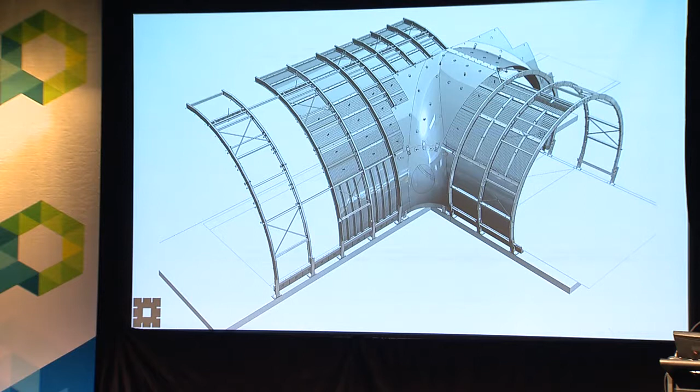This thing I will talk about in a bit, that's called a tusk. So these are all standard components. These are largely bespoke, because wherever they've just had to weave the tunnels through there, the connecting bits, they're quite nice. So we've got a SolidWorks model that operates at the level of the Crossrail tunnel system, right down to, I literally mean every single washer, nut, bolt, screw, the whole thing is in there. This model talks to the SAP system, so it controls procurement, it talks logistics, it talks to sequencing. Everything is now done completely through that model. It's a very, very digital workflow.

That's a mold for that tusk. That is CNC milled directly from the model, because you couldn't do enough drawings to describe that thing. So the fact they're all a bit different and bespoke doesn't matter, because the computer doesn't care. It takes up the shape. CNC mills the mold, and then these things are coming out, and they're absolutely perfect. I'll sort of speed over that. You can imagine we're tracking every component. We're doing some nice Dynamo workflows to check the fit.

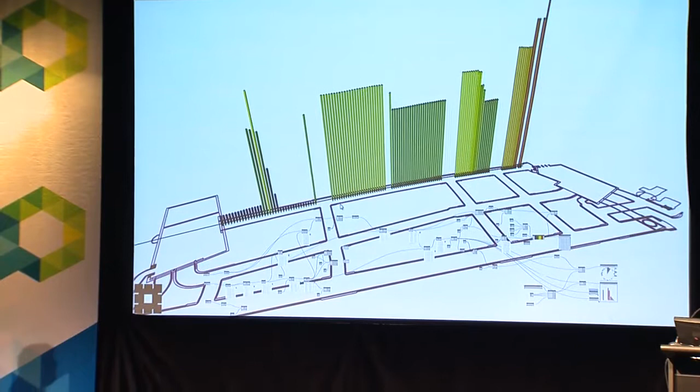So that's a nightmare. So I was saying, that doesn't look good. What's the scale on that? So it's out by, you can't read that, 1.5 mm. So that's about 300 meters long, and we're out by 1.5 mm at that scale on that project, which is smooth. I'll skip over that bit.

So we've now got a really nice workflow where the point cloud survey comes to us from the as-built tunnel. Turns out it's not where anyone thought it was. Maybe not surprising, and it's a bit out of tolerance, which is maybe not surprising. But you can imagine the change order that would have come in if day one they'd put the first panel in and gone, doesn't fit. It would have been a disaster. So we've now got a workflow that runs an automated check on the point cloud survey, colors all the components and says where it's in tolerance, out of tolerance, what you need to do. That then goes to a guy with an iPad who marks it up. Then you scabble it. And then it means that these bits are fitting absolutely perfectly.

We designed the lifting frame. We did the swept path analysis to check that you could get the components in, you could get them around, you can get them to site. We plan all the logistics, all the sequencing as per the GSK stuff. And these things are absolutely flying up. This was probably a couple of months ago, but you can see these are going to be absolutely beautiful bits of kit when you get down there. And everyone assumed the limiting factor would be how quickly you can do them. Now the limiting factor is how quickly the factory can make them, because the guys are just channeling these things up. We've heard virtually nothing from the second station, because no one has any questions. No one rings us up to say, what about this and what about this?

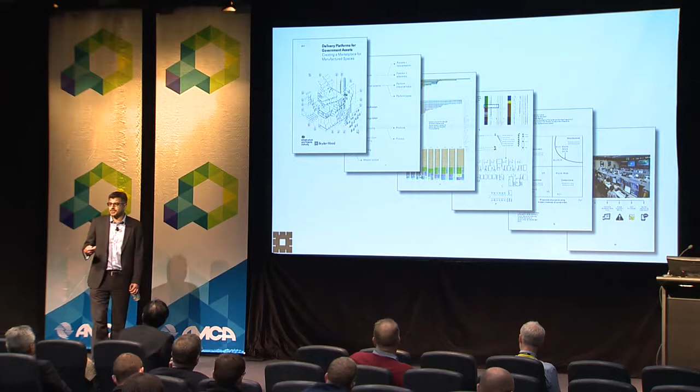We literally don't think the industry can physically build all the things we need to do in the next 5-10 years. So we were asked to write a sort of strategy document. It will be on our website next week, actually, if anyone's interested and wants to read it. There'll be a link to it, and it'll go on the Digital Built Britain website at some point.

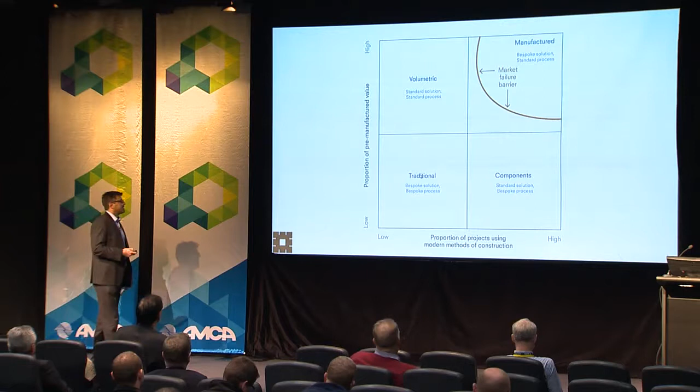What we said, and I think this is sort of Tyler's point from yesterday, no one gets into this proper manufacturing space, because even the big programs, so prisons is about £1 billion, schools is about £4 billion a year, highways is a few billion. At the moment, government sort of buys some prisons and buys some schools and buys some hospitals and all the rest of it. We were saying what you should do is aggregate that spend and start buying components, because at the moment, no one ever gets over that barrier because no one's really got the investment to do a proper manufactured solution. So if you aggregated your £10 billion spend, you could get yourselves into that space.

So we said, this is what you do at the moment. You as the client, you get a PM who assembles a design team, who gets a main contractor who, in our experience, contractors don't actually have anyone directly employed. They basically have a phone book. So they then call their specialists who call these guys, and this is where the magic happens. So when we're building buildings, these are the guys we want to be talking to.

What we said you should do, and you can see this is exactly what highways are doing, this is what Glaxo are doing, this is what prisons are doing, is you should own your digital components, and you should have a known supply chain, or be able to go to such a wide supply chain that you can smash these things. Give them to suppliers and design teams who configure those components as schools and hospitals and so on.

We said every space that anyone ever needs lives on that graph somewhere. So there's only so many clear spans you ever need, and there's only so many clear heights you ever need. And then there's levels of how standard or variable and simple and complex the buildings are, which starts to tell us something about the mass customization-ness of the components. So we hypothesized that with a few platforms, just in the way that every BMW car uses exactly the same platform. So some cars have got too good a chassis, but it doesn't matter because it wasn't worth the bother of making a less good chassis.

We said if you had a sort of housing system, general office type system, and you've got a kind of big space system, that's most of the things that you would need to buy. If you were then buying loads of them, then you could really get into optimizing those. You could really get into understanding the supply chain. You would start to get incredibly good at assembling buildings using known methodology, and you could start to upskill people and all the rest of it.

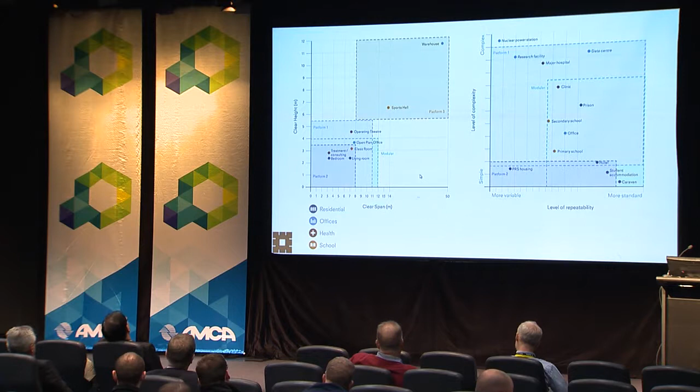This one, we've developed all of these. The Glaxo one kind of sits in there. We've got another one we're developing. We've got a housing one we're prototyping at the moment, and we've got this one we're prototyping at the moment. This one we're going to open source to see what happens. So we're going to make it, test it, validate it, prototype it, get all the digital things, and then put it out in the world.

So we hear people talking about this sort of exciting new world where imagine we were all working in an open source collaborative environment and we could build anything we wanted with components that we could get off the internet. My 7-year-old will go, what, like Minecraft? I'm already doing that today. So we're trying to cultivate that sort of culture where we're going to make these components available. Hopefully people will start to pick them up and use them and refine them, improve them, and find the other bits that we need. The supply chain will start to respond and say, actually, I could make loads of those.

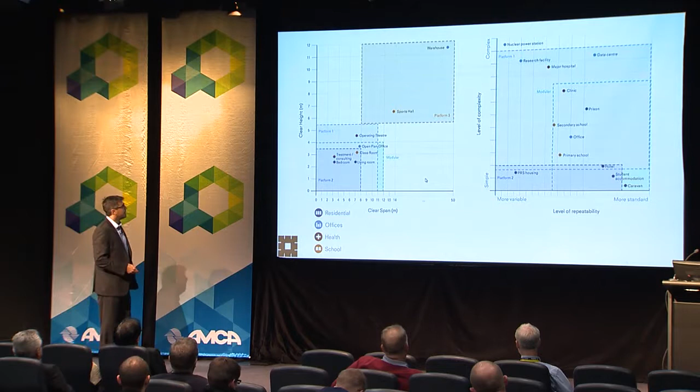Government is taking this really seriously now. They've sort of adopted that book as part of their strategy for sorting out construction. We're doing the big prison estates transformation program at the moment. So we said there's two things we'll investigate. The problem statement was how do you reduce reoffending?

So reoffending costs the UK taxpayer £13 billion a year at the moment. So there's people coming out of prison, they don't know how to cope, they can't sort themselves out, they fall back into crime, they come back into prison.

We're saying, the first year, we spent just understanding what would create a rehabilitative environment. So this was effectively chip thinking for prisons to work out what a new prison estate would be like. I can't show you any of the outputs for fairly obvious reasons, but we've now got a very different design for a prison, which should be much more rehabilitative.

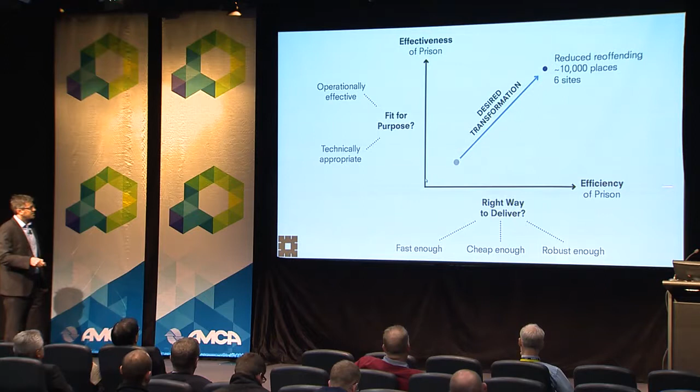And then we said, right, now we've got that, now we're going to work out what's the quickest, cheapest way you can possibly build these things. So these on the metrics, you can see a very similar graph. We said you probably need 4 platform systems. You need one for the house block accommodation, one for most of the other spaces, so where you've got offices and classrooms and other things. You need a sort of big space, architectural space, and then you need a big sort of general space.

What we found is that about 80% of that, so that's about £1 billion, needs 2 platforms that we're currently prototyping. We will design the life out of these things. But you can imagine if you're going to buy £1 billion worth of stuff, you can put a huge amount of effort into really optimizing it, exploding the supply chain, really getting into the detail. This, I think, is really powerful.

So the metric so far we're getting is that the labour component needs to be about 60% low-skilled people that we've trained, and quite a bit of supervision. We'll put in the first ones, and then only a few skilled people for some of the electrical things and commissioning and crane drivers and some of the other bits. So we reckon of the £1.3 billion, a massive chunk of it is going to be low-skilled labour. So this is apprentices, this is local people that we'll employ to build their local prison.

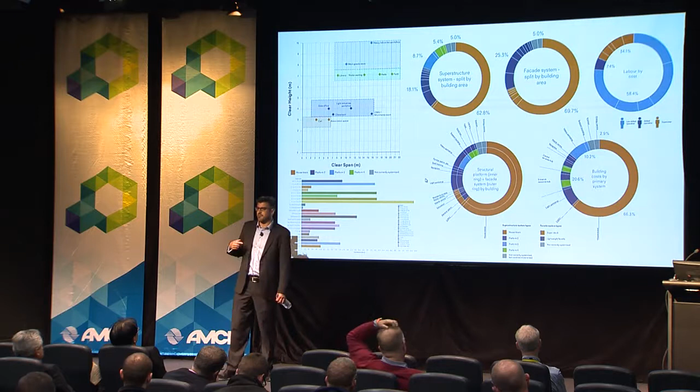So that's a fantastic and good news story from the government's point of view, that even before the prisons open, it will be pumping money into the local economy because we'll be getting local people to build this. The other thing which is possible, which we're having very serious conversations about at the moment, is that we can get prison labour. They already have some manufacturing capability. We can get them to make some of the components for these.

So that is a fantastic good news story, because firstly, the cost of construction plummets because we've got people that are very cheap because they're in prison. But the real trick is that you use that construction program to teach them about manufacturing and warehousing and logistics and basic assembly. So they come out of prison, they're less likely to reoffend because you've taught them some skills. So straight away, again, forget your construction cost. If you can lower that £13 billion, that's magic.

And we're tying together this delivery with the Heathrow expansion programme, and then the schools programme, and then presumably Crossrail 2 and HS2, all the rest of it. So you start to get a pipeline of projects using some of the same components, using the same methodology. So suddenly you get this kind of long-term plan of going, well, actually, let's engage local people, low-skilled people, let's engage prisoners. They'll be less likely to reoffend, and they will build the next generation of infrastructure.

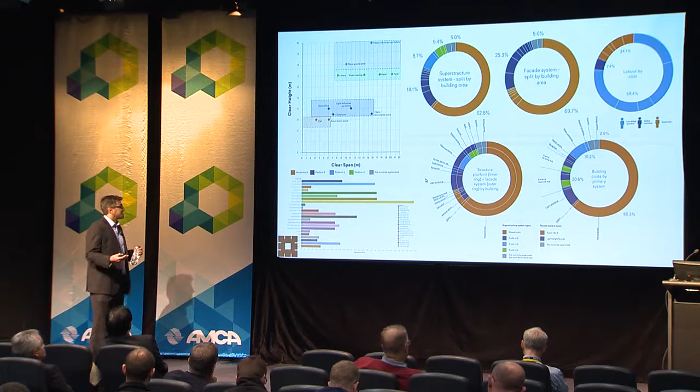You've sorted out the skills gap. You've created manufacturing capability for the UK. You've changed the way you deliver major infrastructure projects. And it's potentially a fantastic good news story. So hopefully, as I say, we're prototyping this now, we'll be on the site with the first ones early next year, Q1, Q2 next year. So if you're interested, then keep tabs on that, because it might be very exciting.